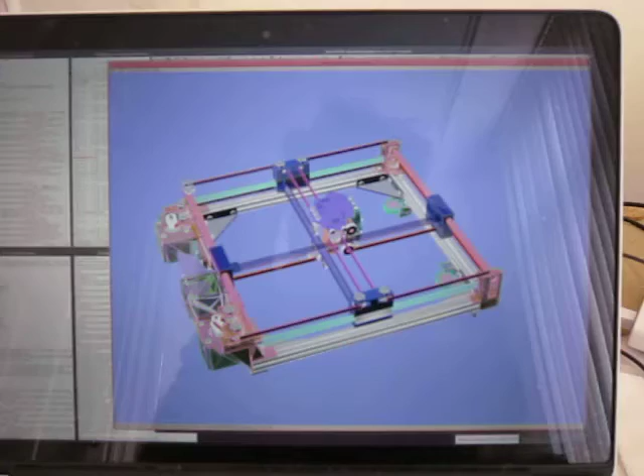Okay, welcome to the Sandwich200 version 2 belt walkthrough for the replacement for the Core XY kinematics with the unnamed plotter arrangement that was brought prominently to attention by RichRap with the Sli3DR printer.

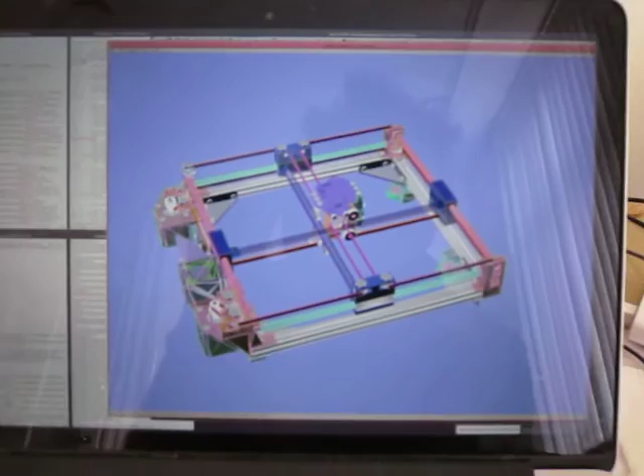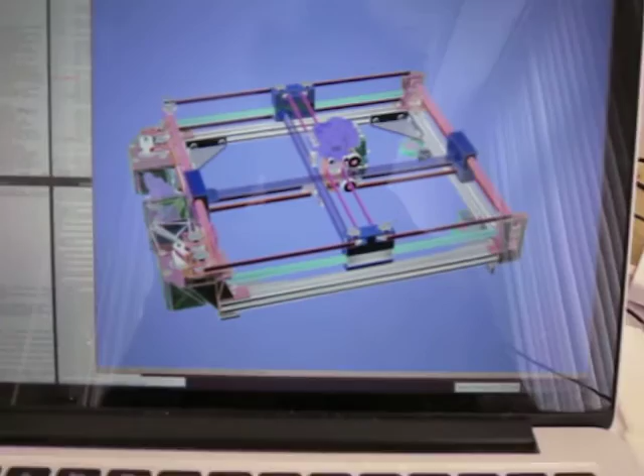The previous video I just did a walkthrough of the parts, but this time what I've done, as you can see in the darker colours, is I've put in a representation of the belt using a Python class which actually adds up the belt as you go along. And I've moved the carriage into the middle. I just want to take you through.

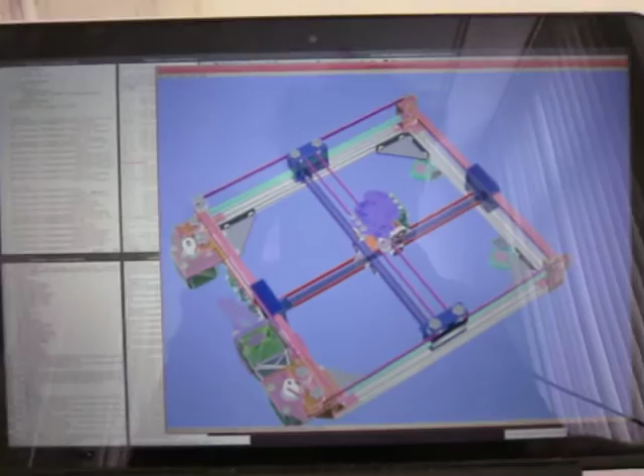Basically, the point of doing this is that I got a 3 meter belt. I cut it in half. The belts have to be under 1.5 meters each. Anything over that, and I'd be screwed. So, although the Python classes have the ability to put in arcs, I haven't yet coded it up. But instead I've done a hand calculation. You can see the tiny mouse I pointed out around here.

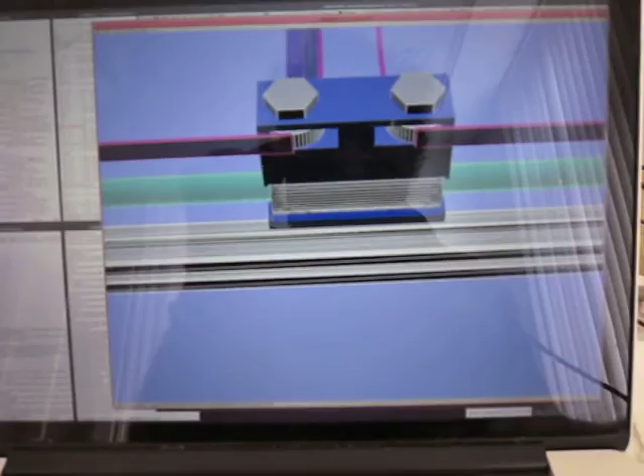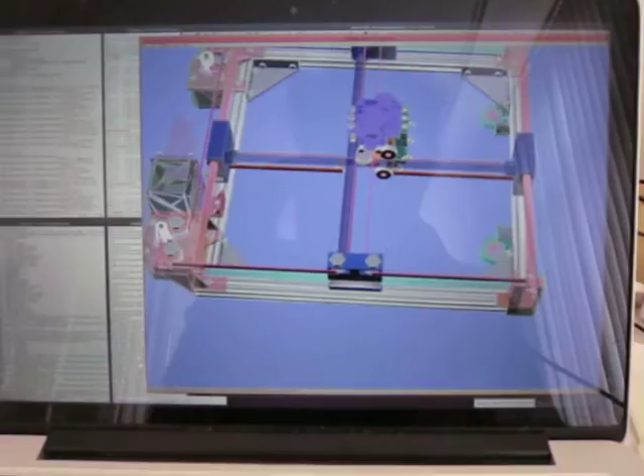Okay, so let's walk you through the path on these 2 belts. Mostly this is for my own sanity and checking. All right, so that one goes that way. So the X belt starts down here. I'm sorry, the mouse isn't very big. This is an extremely high resolution screen. I'll move it into the center of the screen. Okay, so starts there,

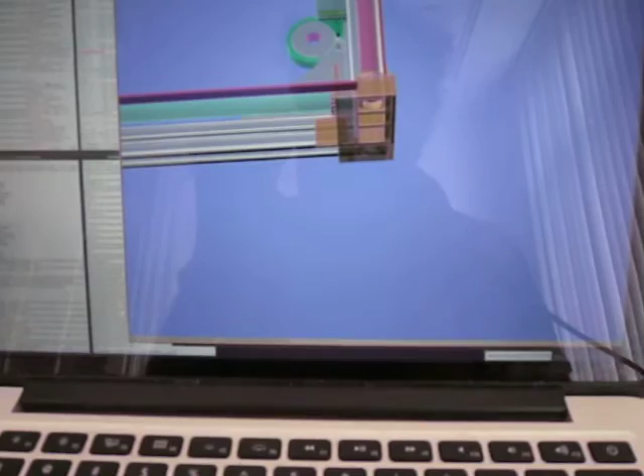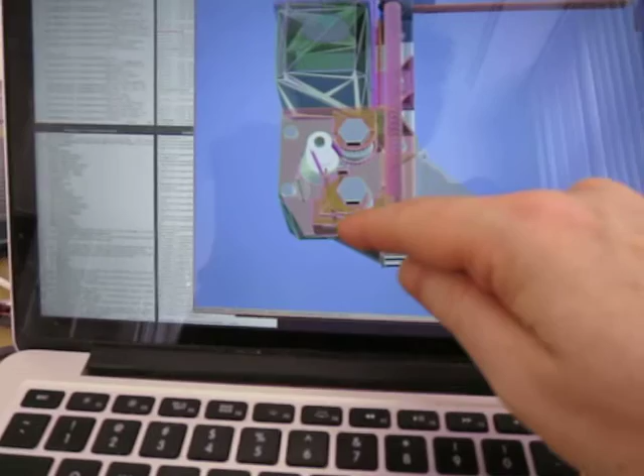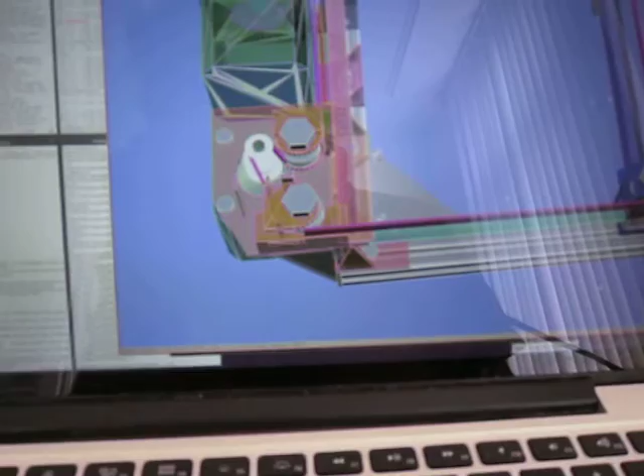goes to this bearing here, turns right, goes up to this bearing which is on the carriage, comes back 90 degrees, then goes back into the X end, turns right, turns through a rather odd angle here. Now this is a GT2 16, so the more of an angle you can get on here the better. So I've made it roughly 165 degrees, something like that. If I look at the Python code somewhere, minus 20, 145, whatever.

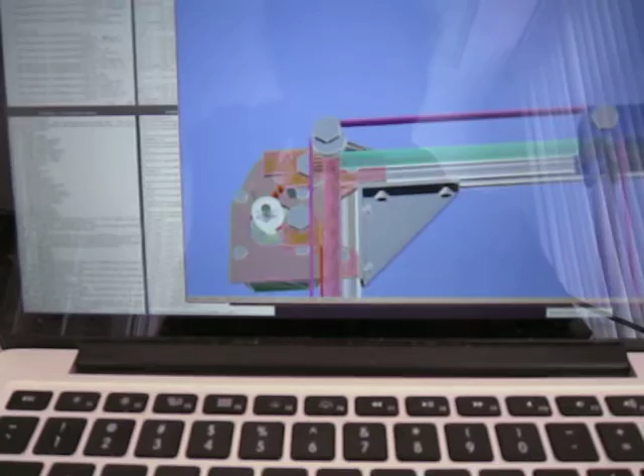Okay, goes to the second bearing, then goes up all the way to this idler here, which I previously had in the wrong position, so it's extremely good that I did this exercise. That bearing was just over there previously. Okay, over to here, right angle again on the X end, back down to the carriage.

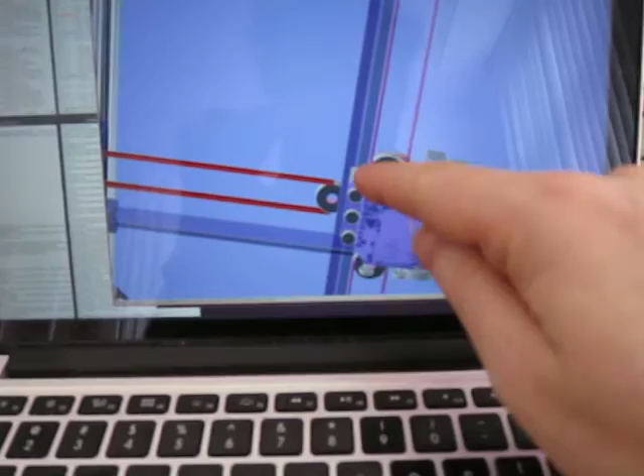Let me rotate that for you. There, you can see we're now looking at an angle down, sort of like this way. Back up again. Let me rotate it back again. And back, and finally round to there where there will be a variable stop, so we can change the tension in the belt. All right, so that's that one.

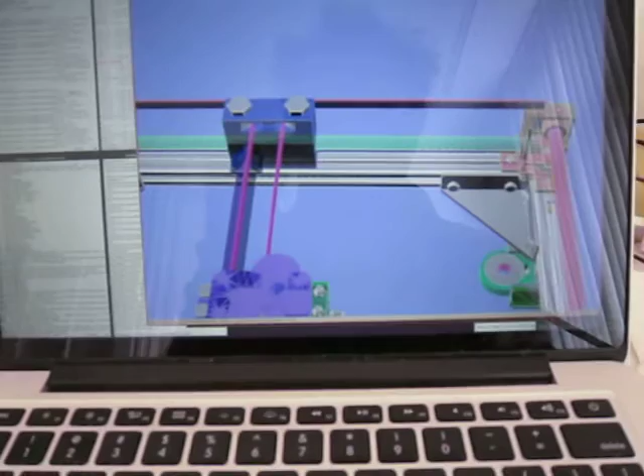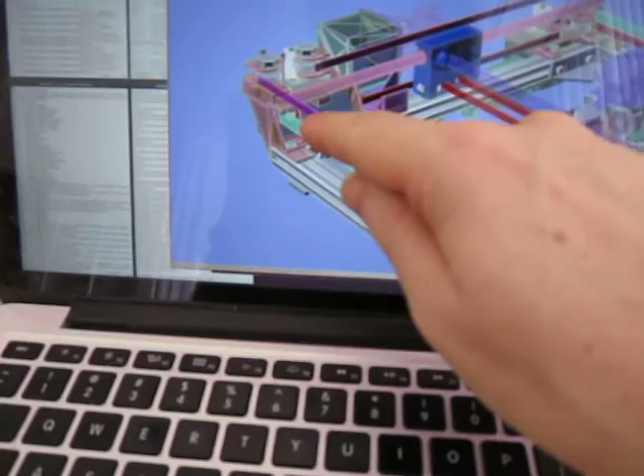All right, the other belt. It's actually really hard to see. It starts... where is it? That red line, it's in there. Starts there, and it's that red line there. This wall on that motor will be moved back by 4 millimeters, I think it is, so that we'll have the motor there and there'll be a hole in, etc., all that sort of stuff.

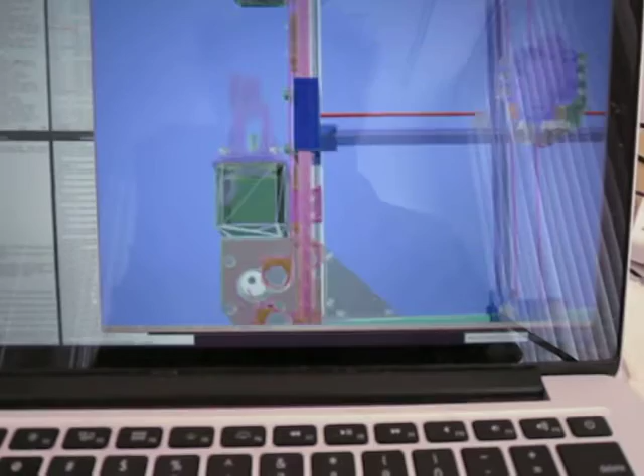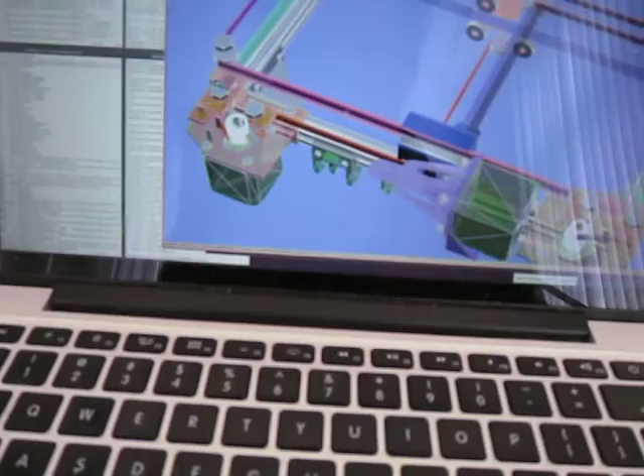So it goes up there. Let me turn it through 90 degrees. It turns right on there, goes up to that one, comes back, goes round, goes to this bearing here. Let me just move that to the center. I keep moving the camera instead of the thing. Okay, and then it goes that weird dog leg on there.

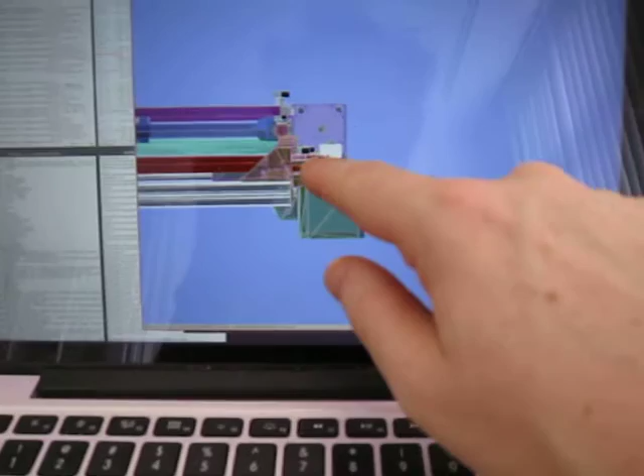Comes out at the lower bit down there, right, then goes straight down at the lower level, just missing the back of that. Ooh, does it? Let me check.

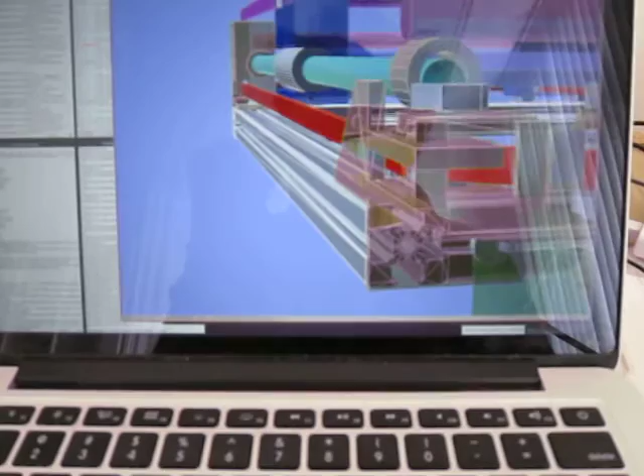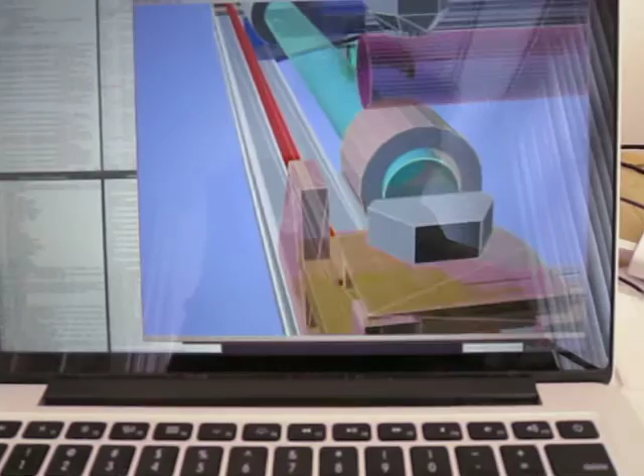Ooh, I don't think that. Ooh, it's really tight. Yeah, it does. It misses it by 1 millimeter. Good God. I'm going to have to alter that because the vibration on that belt will end up hitting that. Yeah. I've actually got enough room to be able to do that, so what I might do instead is just move the bearings over a tiny bit.

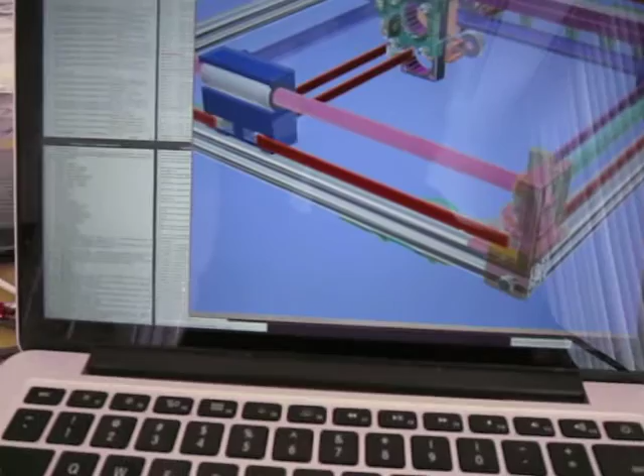Then it goes onto this idler down here, this idler bearing, then into that one, back round again, and finally hits the end there. Well, again, I will decide which of those. Probably this one over here will be the fixed one because it's so inconvenient to get to, and that one will be the belt tensioner point.

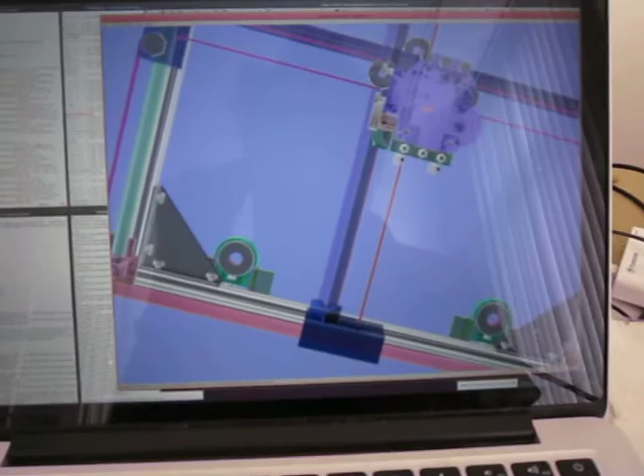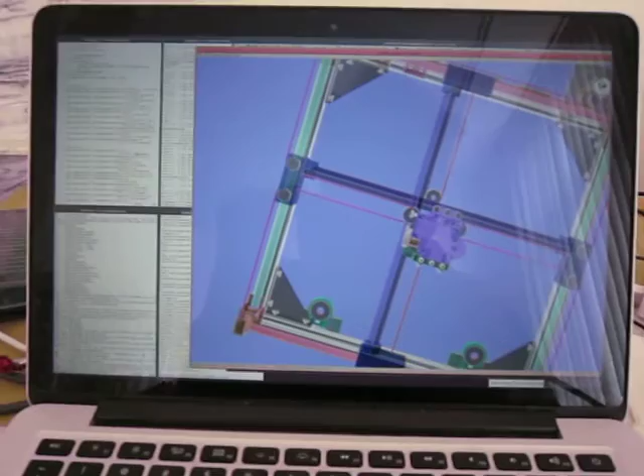And the lengths of those are 1332 millimeters and 1374 millimeters. That's excluding the extra 50 millimeters for going around the bearings themselves. 2 times pi times 16, 2 times pi times 16 millimeters diameter around the bearings. So yeah. It's ridiculously tight. It's very, very close. So I think on the one belt we've got like 25 millimeters to spare, which is that much. Oh, good grief.

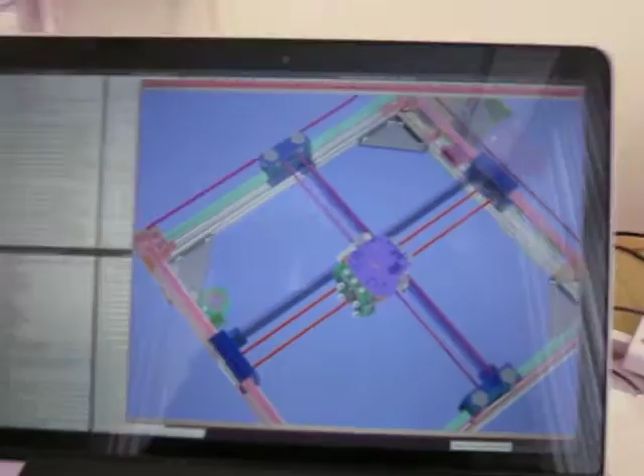The one thing that has not been noticed by anybody else in the community is that this arrangement, because you've got the pulley arrangement on here, you actually get an automatic 2-to-1 gearing ratio out of the thing. So if you were to use GT2 20s, you would still get twice the accuracy, twice the resolution that you would normally get.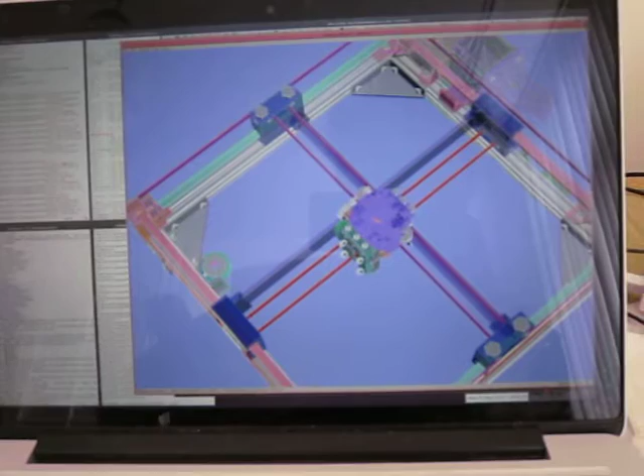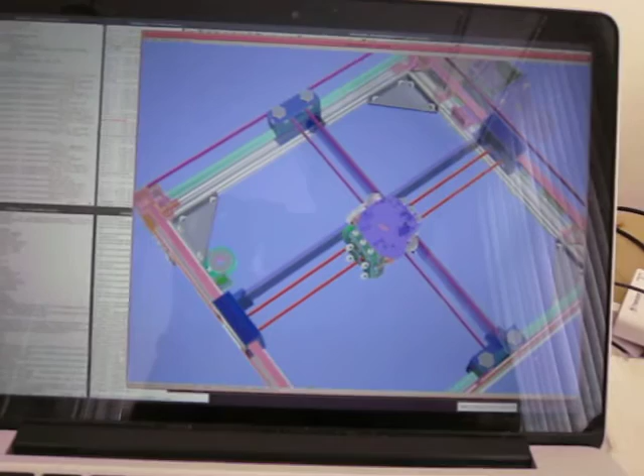And by using GT2 16s, that's 2.5 times, isn't it? 20 over 16, yes, so 1.25, roughly, times 2, yeah, 2.5 times better than a standard, even a Core XY or anything. So in combination with using the 0.9 degree stepper motors, you get a lot. It's a big advantage.

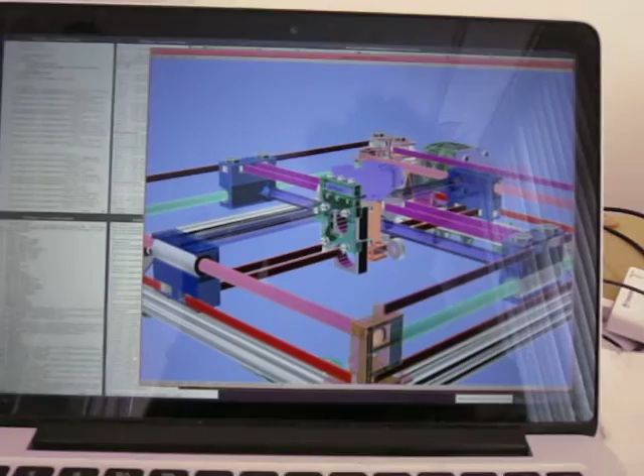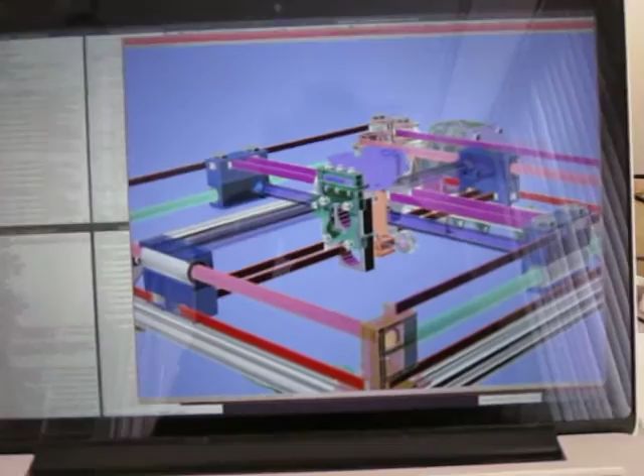Yeah, you can see there those. I'm just gonna have to live with the fact that those are offset on different levels. You can see that it's pulling there, and this one is pulling at the bottom, so that's top and that's bottom. If I want to do this any other way, it's going to have to be an extra 50 millimeters on the length and the width. That means total redesign, basically.

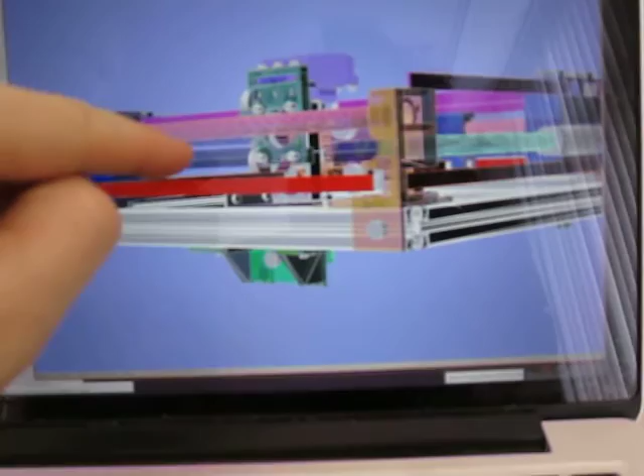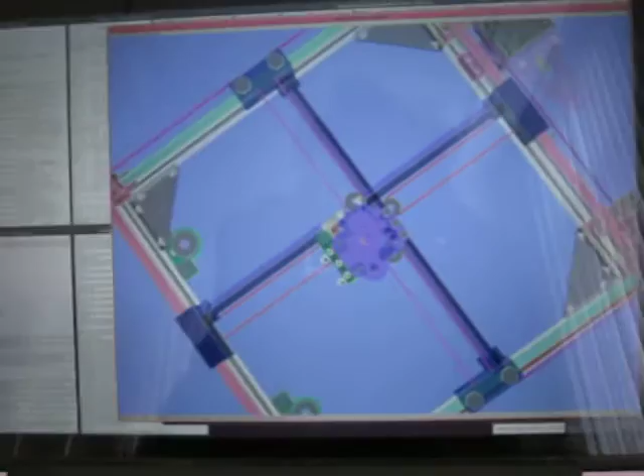So as I mentioned in the previous video, we've got this sort of stacked, it's higher up. Normally what you would do is let this belt be at that level, and the other belt will be there, so they will be the other way round. And where are you? That one will be on the other side of this cross member, and that one would definitely be on the other side of that cross member. I just haven't got the space to do it, so it's had to go above it, because it can't go there. This has to be bigger. Oh.

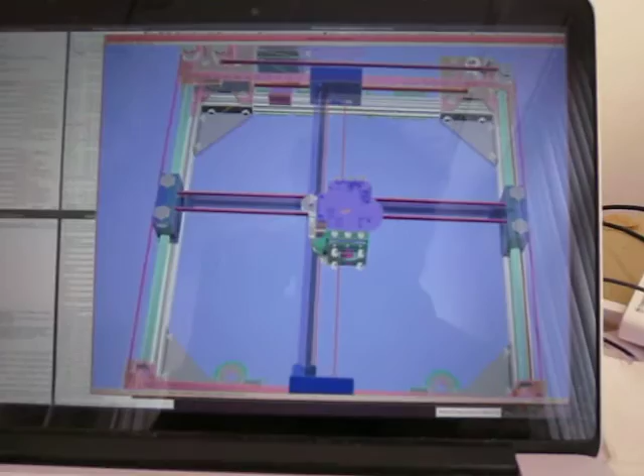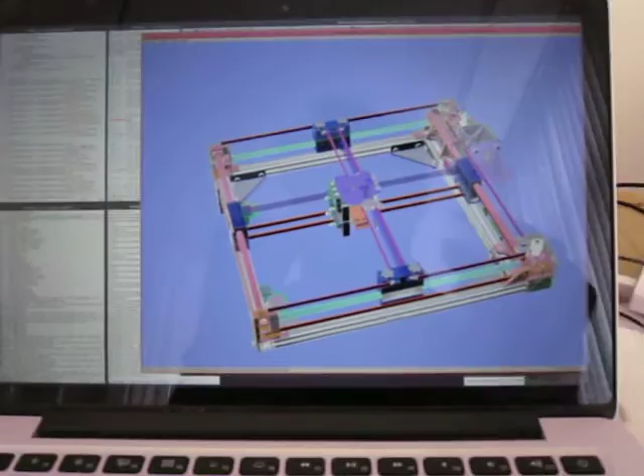Welcome to 3D design. So yeah, with great relief, I am pleased to announce that I've managed to keep both belts down to a 1.5 meter length, and I can now have a big sigh of relief, celebrate, and maybe even start printing out these pieces, because I'm reasonably confident. I've got a couple of modifications, but reasonably confident. I've got to put the idler things on the corners, redo these things, add some support structures on here, sort these things out, and we're done.